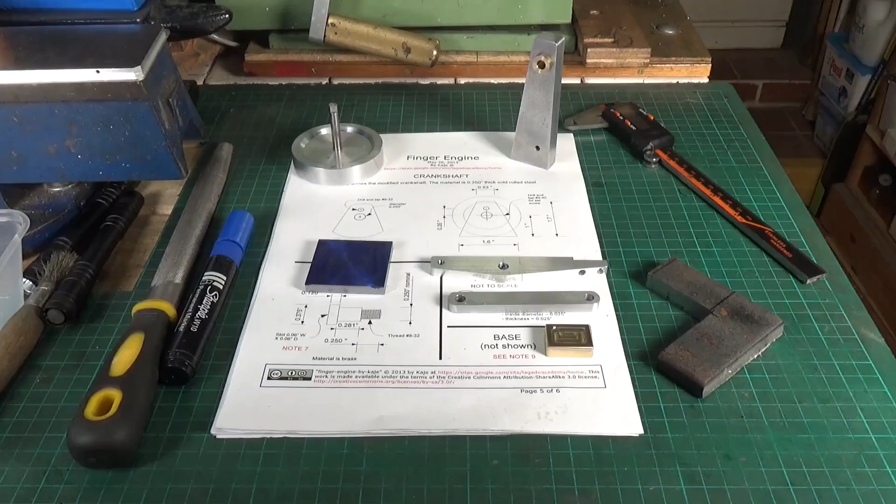So the next part is the crank, and I'll zoom in on that a bit so hopefully you can see it a bit clearer. So ultimately we're going to end up with this, but we're going to start off with a rectangular piece of, it says cold rolled steel, so I've got some mild steel plate which I'm going to make myself. So yeah, we still need to start with a rectangular bit of steel which is 1.7 inches by 1.6 inches.

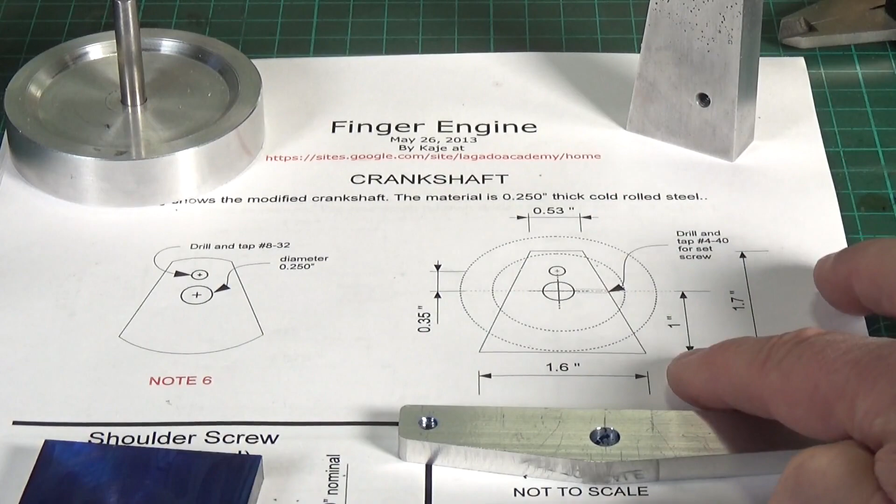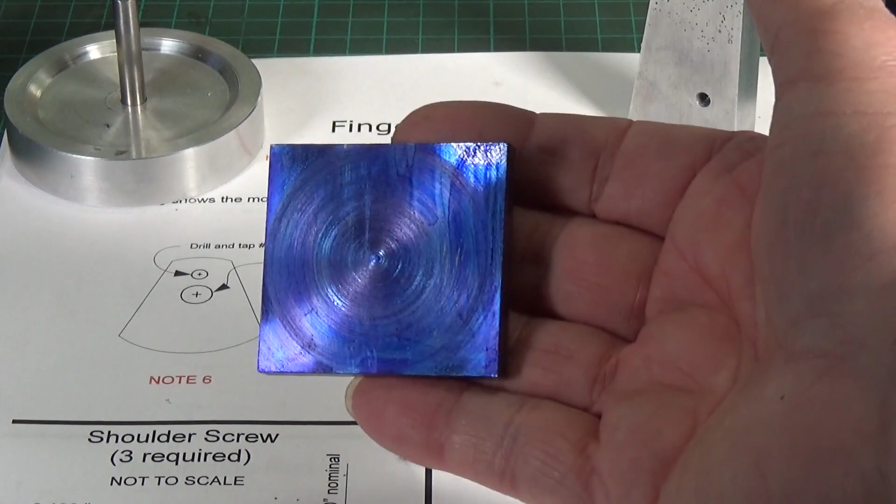So it needs to be 1/4 inch thick. I didn't have any 1/4 inch thick steel plate, so the closest thing I had was this. So this is a bit of rough mild steel plate, which is 12mm. So I rough cut out a section oversize, squared it up, which is this piece here, squared it up on the Sherline, and then put it in the Warco lathe to turn it down to thickness because it only needs to be 1/4 inch.

This went in the Warco all quite nicely. So basically, the reason for doing this is that whilst I could have done it on the Sherline, it would take ages on the Sherline to do it because my lathe, although it's only small, is a hell of a lot more powerful than the Sherline mill is. So I can take bigger cuts even on steel on the lathe. So it didn't take me too long to get that down to thickness.

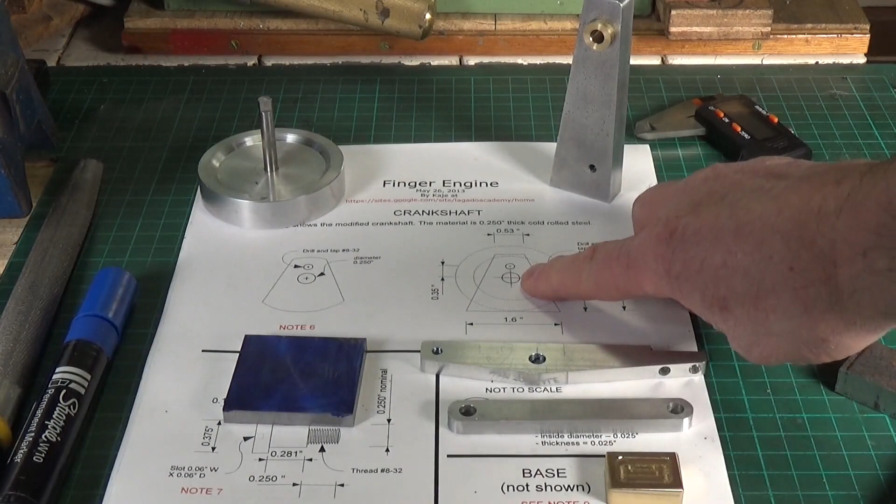So now I've blued this up. Now I need to mark that off, and then we'll stick it on the Sherline and get it down to the right rectangle size. And then basically we have to drill 3 holes in it and tap 2 of them. This larger hole here in the middle, that is a 1/4 inch drilled and reamed, and that is the part which slides over the shaft. And then there is a small hole which is 0.35 inch away from that, which is tapped, and that's where the conrod will attach with one of these screw pivots.

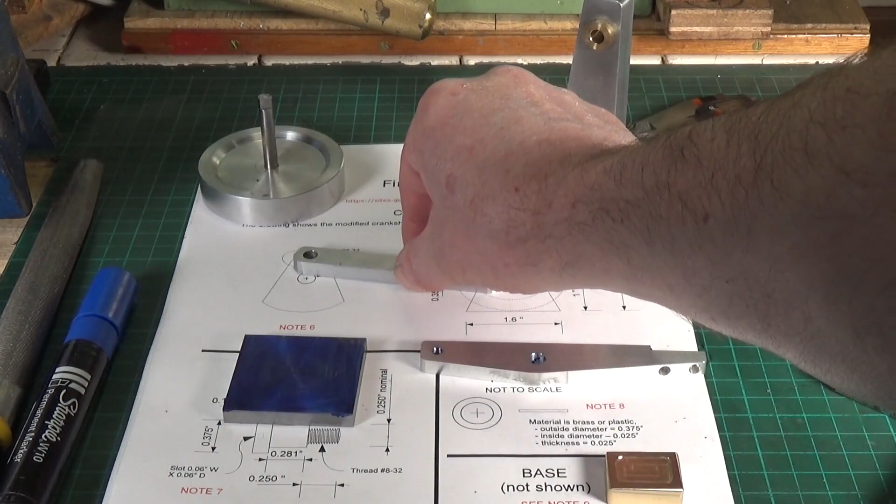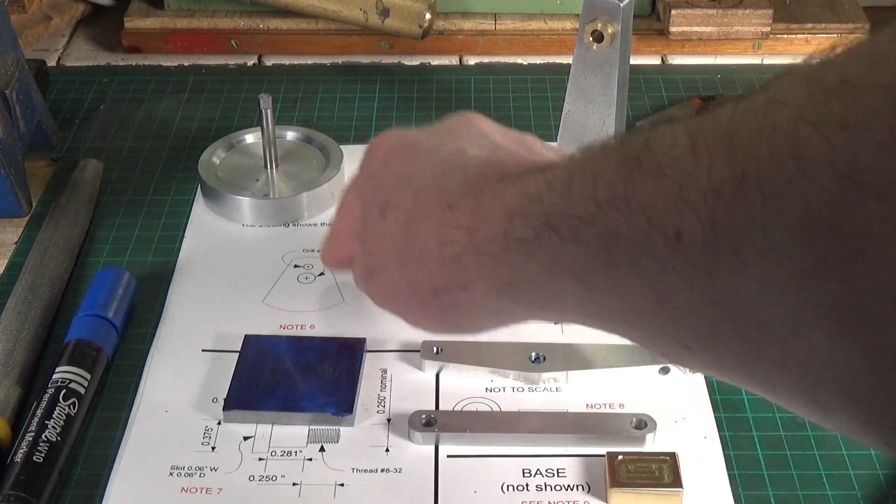And then there's a very small hole which is drilled in from the side and tapped 4-40, which is for the set screw, which will hold the crank onto the shaft. Now I'm going to do all this drilling and tapping while it's still a rectangle, and then the final operation will be to put these angles on the side and round off the ends. So that's what we've got to do with the crank. So let's get over to the Sherline.

Okay, so we're set up on the Sherline. Now we've got quite a bit to take off on this face and on this face. Unfortunately, this is where the limitations of a tiny little modelling mill like the Sherline do come into their own. Now it's fine with aluminium and brass, but with steel, yes, you can machine steel with it. It will cut, no problem, but you can only take very small cuts at a time because it is a very low-powered bit of kit. So it does take time. It produces a nice finish, but it does take time.

So I'll get going on this so you can have a quick look, but I'm not going to show you all of it because it is going to take me a while to do both of these faces. But let's close in on that. Okay, so we've got our very high-tech, very flash doorknob, which has been turned into a cutting fluid receptacle. Works really well actually. And put some lube on there. Get this going. We're looking at about 800-900 RPM for steel using this size cutter.

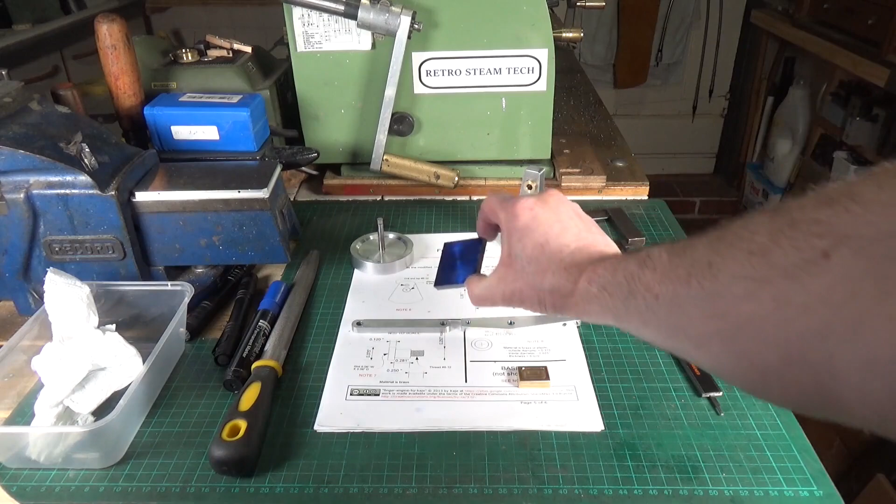Okay, well I'm going to keep going with this and I'll bring you back when we're down to size. Okay, so some significant amount of time later, the little block is now to dimensions, and I've marked on there exactly, well you'll see that on the camera, exactly where our 2 holes are supposed to be. One for the pivot and one for where the conrod attaches.

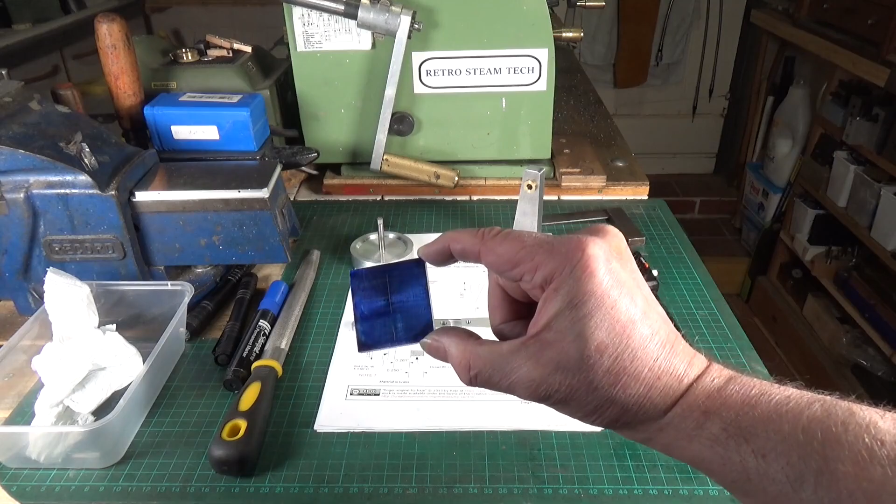So I'm going to spot drill those on the Sherline now. I'm going to have a go at drilling on the Sherline. I'm not sure whether it's man enough for it, but we'll give it a go. Well, using my calibrated eyeball, I have the spot drill lined up on the first hole, which is the pivot hole. And we're going to spot that. There's a 4mm spot drill in there, so we'll close in a bit for you.

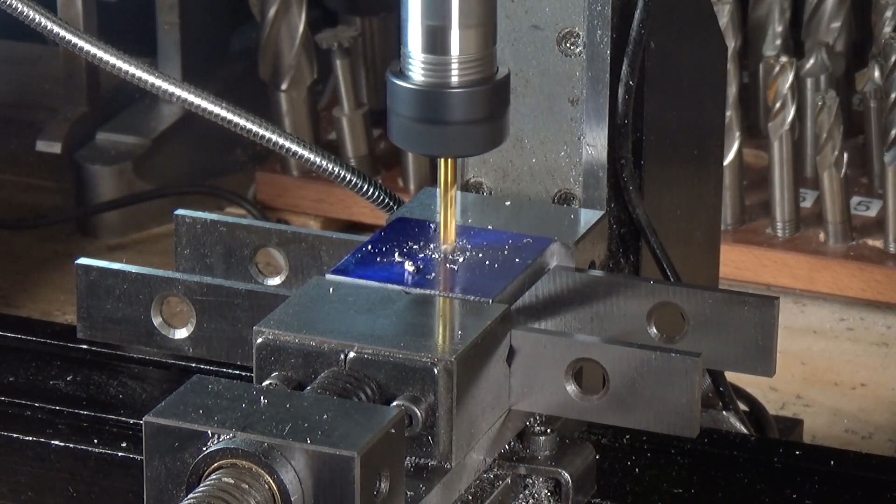And then I'll move it without moving the x-axis. I'll move the y-axis across and spot the other hole. Now we can increase the speed because we're drilling, not milling. So that's our pivot hole spotted. And we'll just wind it across to... Right, there we go. I'll just line that up accurately, so get my head in there. Okay, so now we'll spot what will be the threaded hole for the conrod attachment.

Right, now I'm going to swap out the spot drill for the 8-32 tapping drill. Now we've got the number 29, which is the 8-32 tapping drill in there. You can see how well this does. Seems to be handling that okay. Right, so that's the hole tapped for the 8-32 thread, which will be on the pivot screw for the conrod.

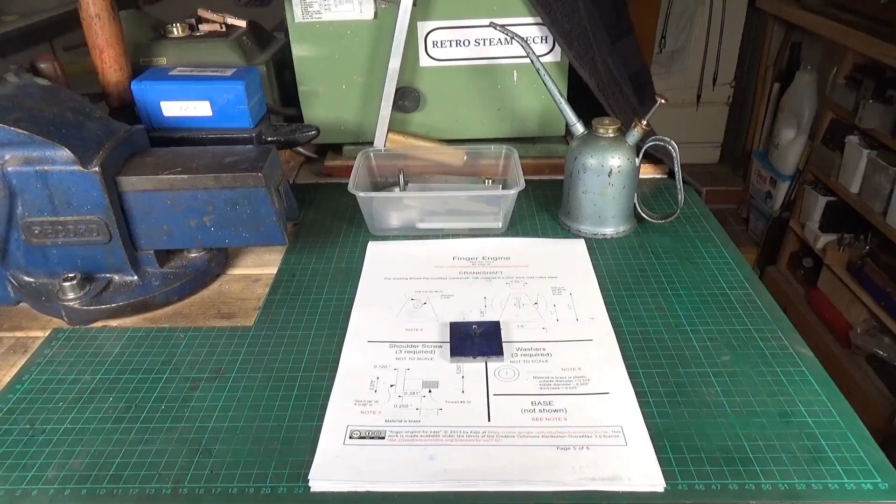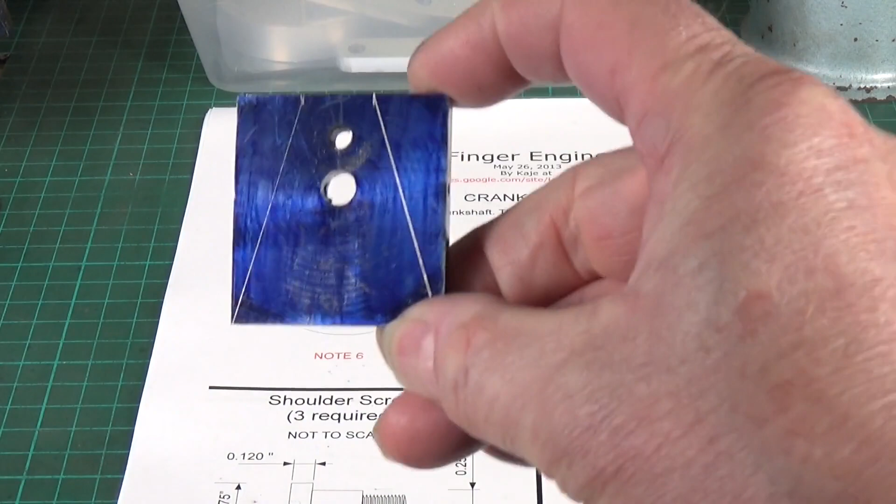Okay, so the next operation on this piece is to cut the shape out so that we end up with this shape here. Close in on that a little bit so you can see it. Yeah, so what we want is this trapezium, I think you'd call it. I've marked the lines on here, so we'll chop most of that off using the bandsaw, and then we'll go over to the Sherline to smooth off those sides.